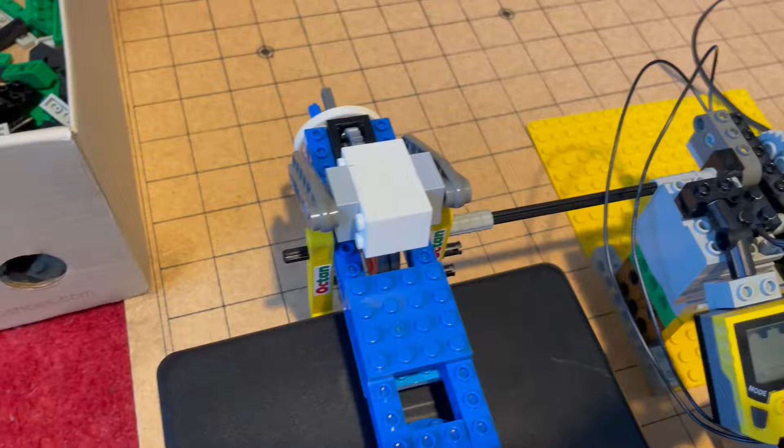In today's video, we investigate joining multiple motors with an axle or a differential. This question comes up all the time. We will test combinations of three motors: an older M motor, a newer M motor, and an XL motor. The M motors have slightly different but still similar torque curves, whereas the XL motor does not. We will join these motors in multiple configurations and see how they perform.

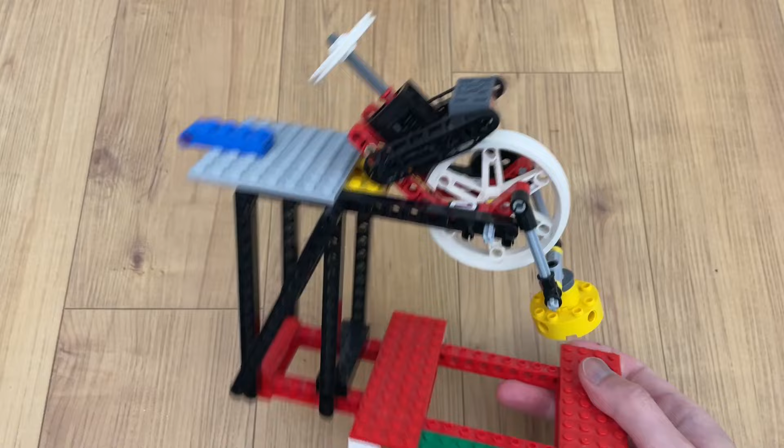Our Prony brake only has one input, so we need a separate jig to mount and connect multiple motors. This does add a little bit of friction, but said friction should affect all tests equally.

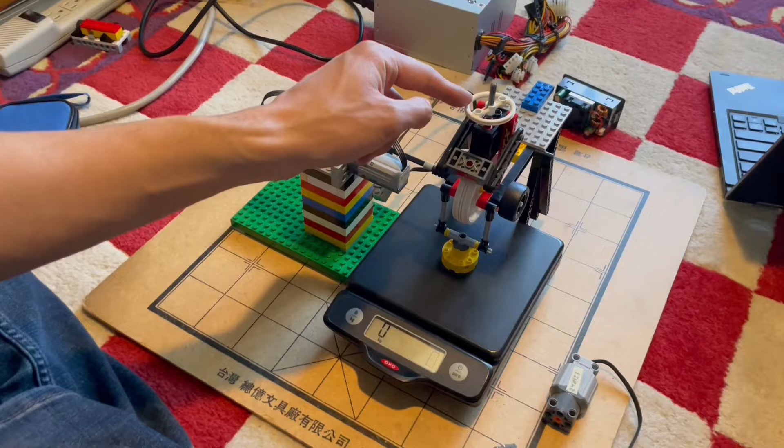Let's look at joining the two M motors first. When we measure their combined outputs with a solid and a differential connection, we find that they're basically the same. In fact, the torque curves for the combined outputs vary less than the curves for the individual motors. They also have slopes half as steep. The combined power curves have peaks twice as high and twice as far to the right.

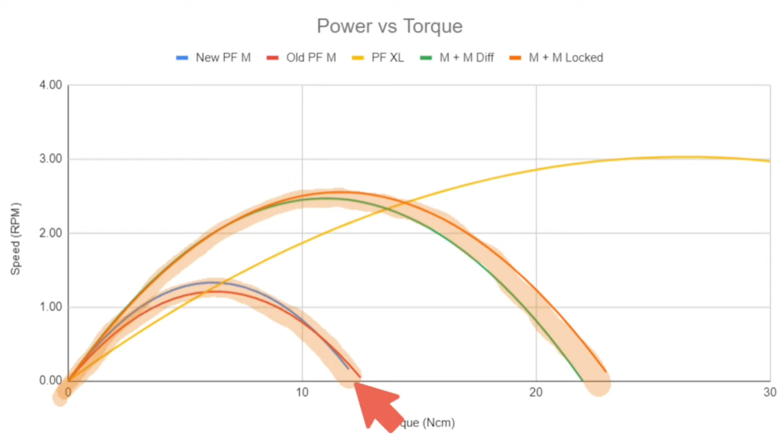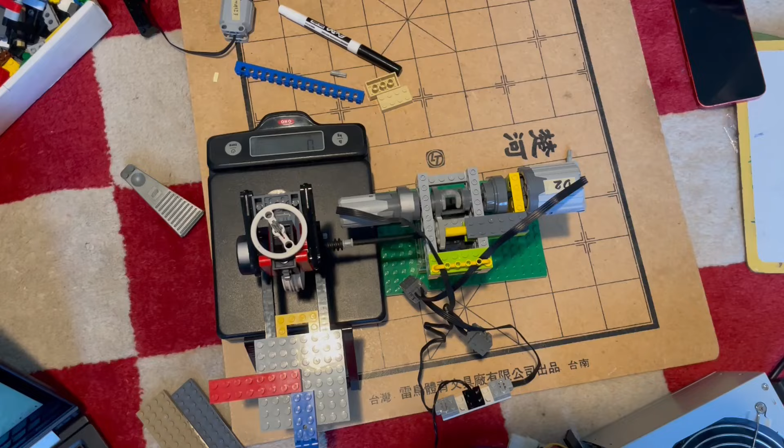These results strongly suggest that the type of connection doesn't really matter for similar motors. Just do the more convenient thing. The end, right? Well, we kind of knew what to expect with the two M motors, but things get more interesting with an M and an XL motor.

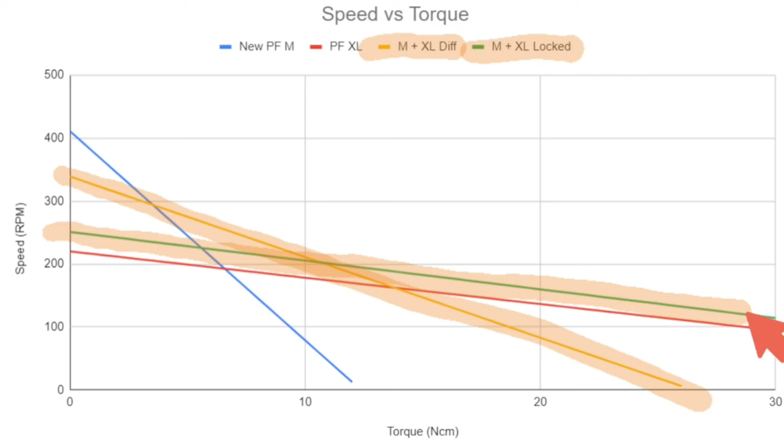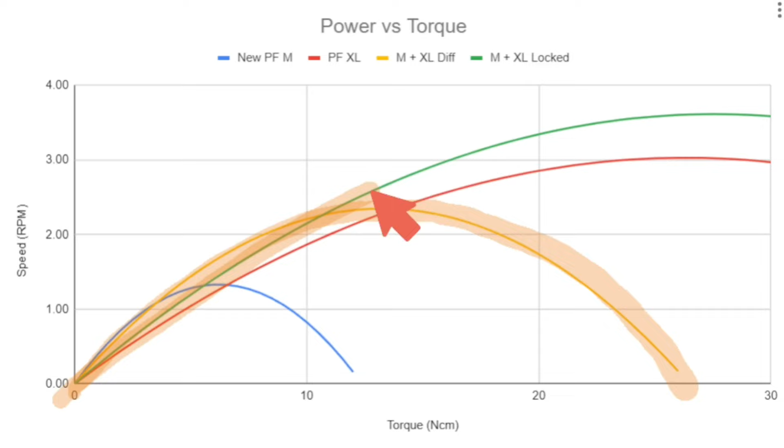Here, the combined torque curves vary considerably between the solid and the differential connection. The curve for the differential connection falls right between the curves of the individual motors, while the curve for the solid connection roughly parallels that of the XL motor. The combined power curves also appear to behave similarly. These results might appear to suggest that a differential connection averages inputs and a solid connection adds inputs, but this still isn't the end.

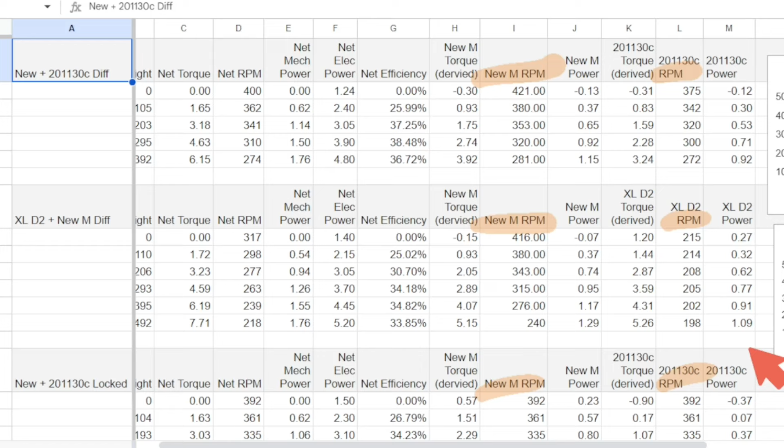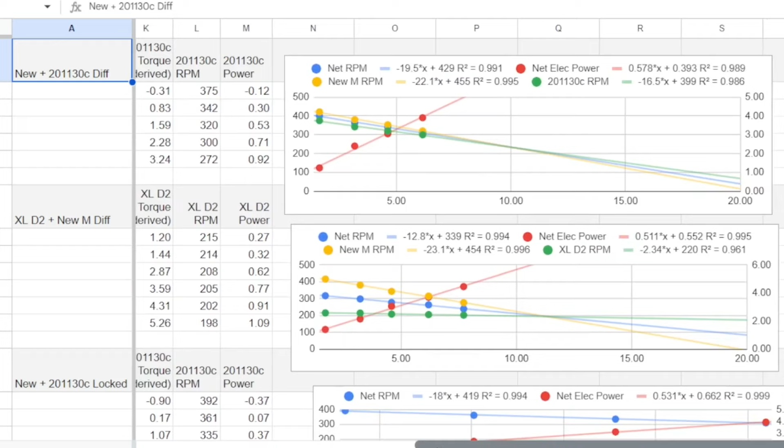For all configurations, we wanted to gauge the performance of individual motors by measuring their RPMs and deriving their torque and power outputs. For the solid connection, the input speeds should equal the output speeds, but for the differential connection, we had to measure the individual motors. For the latter, we had to modify the combining jig to accommodate extra wheels with the reflective tachometer tape.

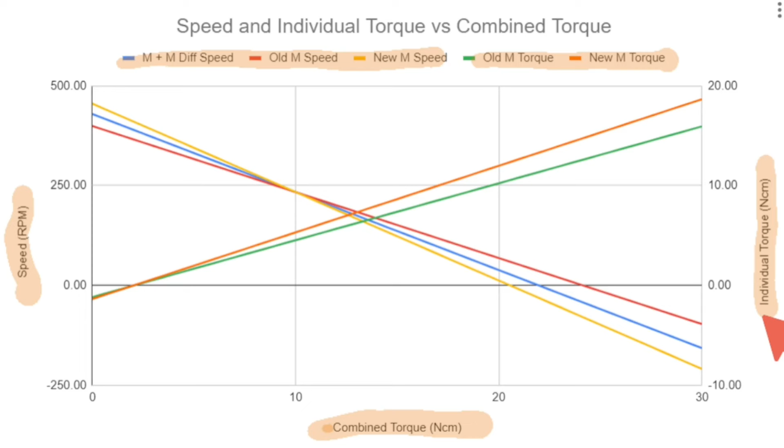These next charts show the speed and torque of individual motors as a function of the combined torque. Speed in RPM is on the left, and torque in Newton centimeters is on the right. Again, the M motors paint a similar picture regardless of the connection type, and the picture makes intuitive sense. M motors stall at just over 10 Newton centimeters, and therefore the combined output stalls at just over 20 Newton centimeters.

The M and XL results look very different, so let's look at the differential connection first. The torque curves predict that the M motor stalls at a combined load of 20 Newton centimeters, but also that the combined output could still keep going after the load overpowers the M motor, but not the XL motor. Note that the torque on the two motors basically remains equal.

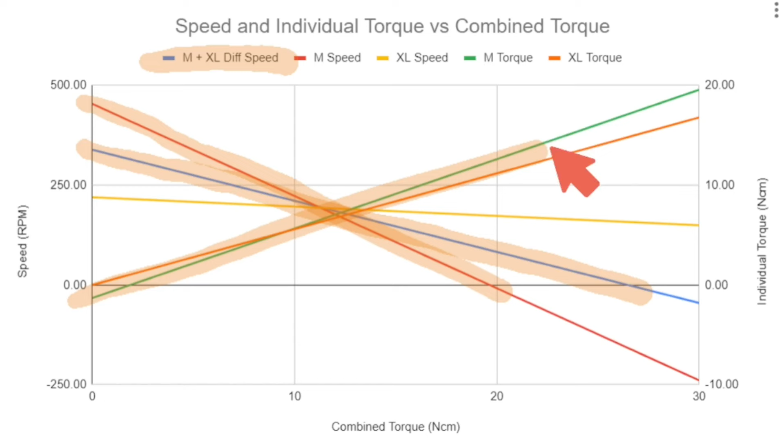Furthermore, the combined power curve peaks about where the M motor's power curve peaks, and it actually drops off below the XL motor's power curve after about 20 Newton centimeters, suggesting that the weaker motor will bottleneck a differential connection.

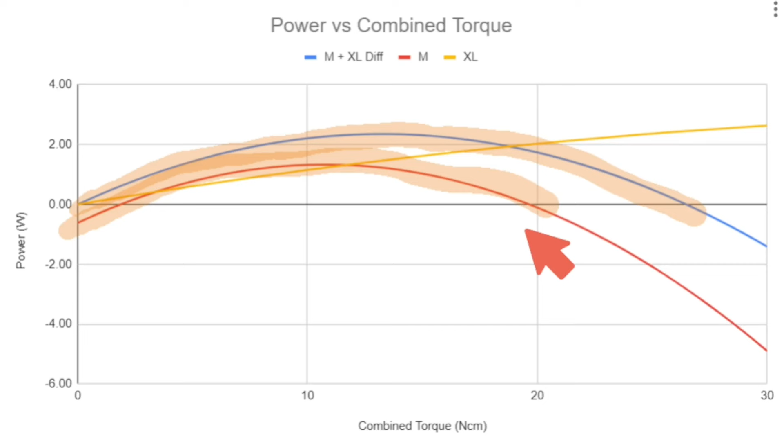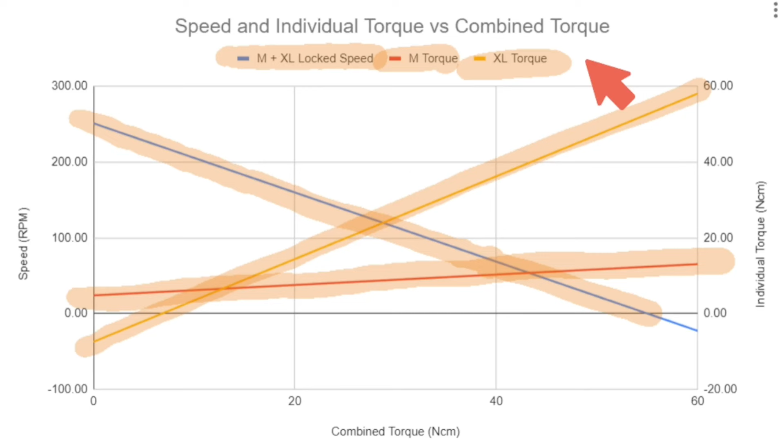As mentioned, the solid connection locks the speeds of the inputs and outputs. In the M and XL combination, this makes the torque on the XL motor start below zero and the torque on the M motor start above zero, and this time not from best fitting lines. With no net torque on the system, the M motor will try to spin the XL motor faster than no load, generating positive torque on the former and negative torque on the latter.

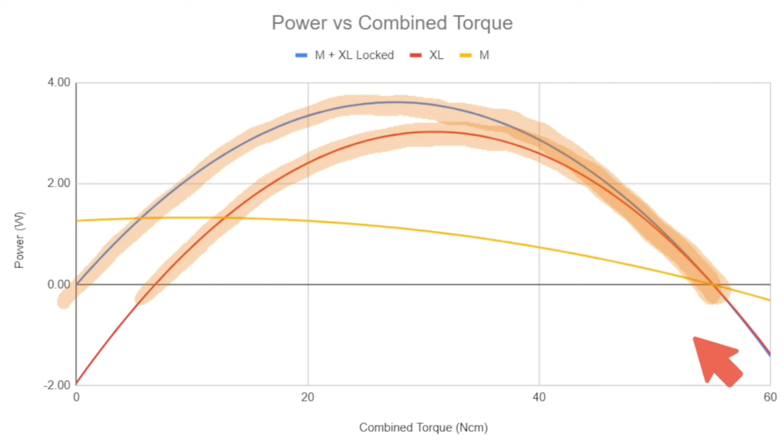This time, the power curve peaks closer to the XL peak with an amplitude only a little bit bigger, suggesting that the stronger motor has more influence over the output of a fixed connection.

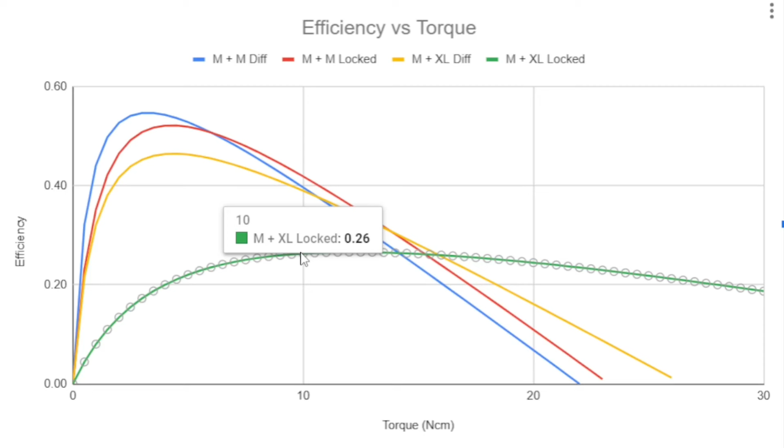Finally, we did try to plot the efficiency of these systems, but the specific numbers don't mean that much because they contain a lot of accumulated error from best fitting lines. The overall shapes still tell us something. Most importantly, that the solidly linked M and XL perform extremely inefficiently. This makes intuitive sense as the two motors spend a lot of power fighting each other rather than contributing to the combined output.

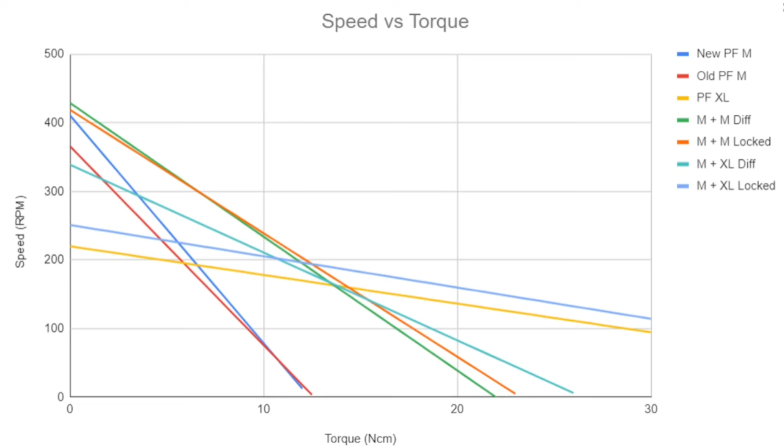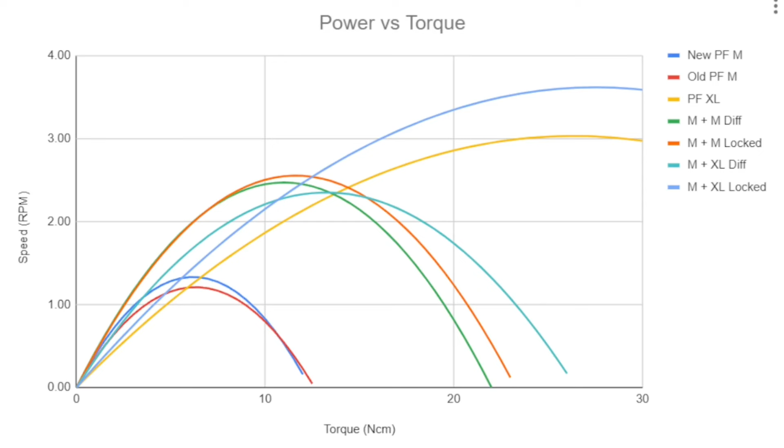In my opinion, the TLDR is that it doesn't matter how you join similar motors because both connections perform the same, and it doesn't matter how you join dissimilar motors because you shouldn't do that in the first place.